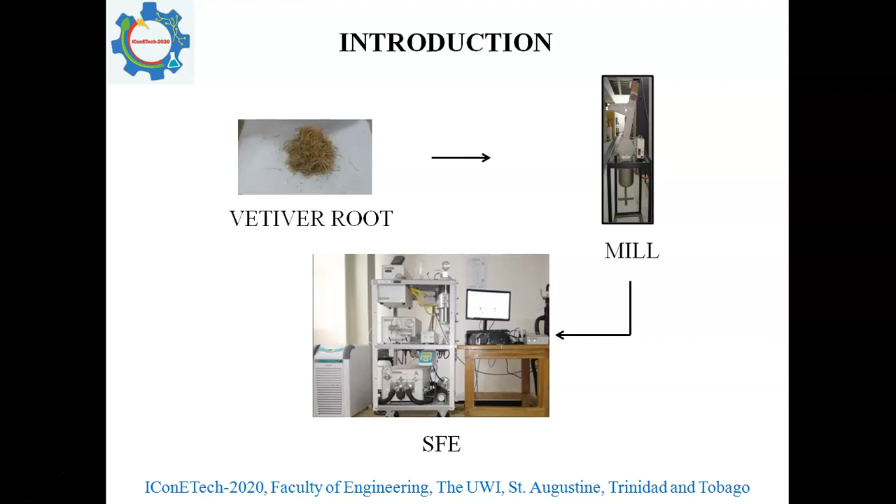The chosen extraction technique is Supercritical Fluid Extraction, abbreviated SFE, using supercritical carbon dioxide solvent, since SFE was found to be more efficient and versatile than the traditional technique of steam distillation extraction. I therefore present a process that uses recyclable supercritical CO2 as a solvent to obtain extracts from vetiver roots.

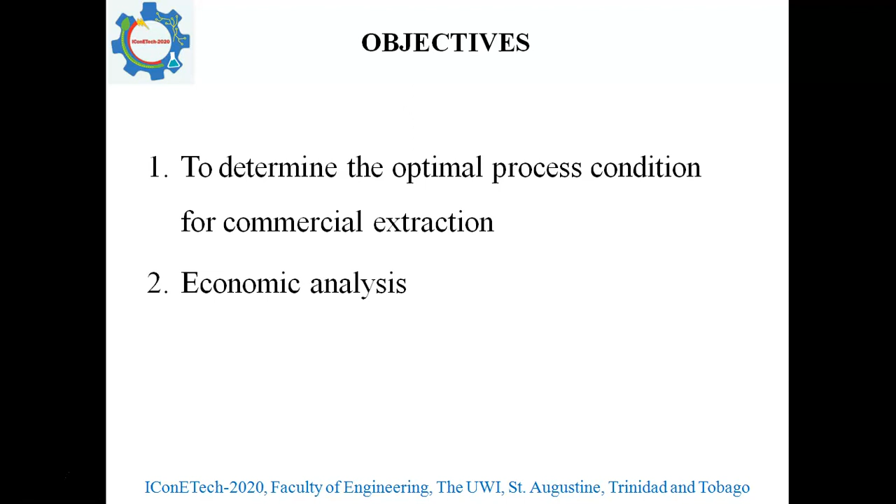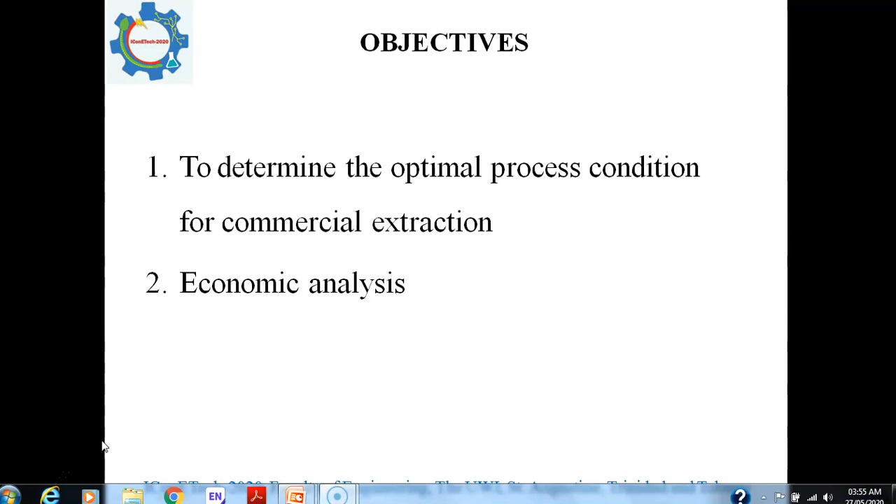Towards developing a plant extracts industry, the research objectives were to determine the optimal process conditions for commercial extraction, followed by an economic analysis to indicate whether the installation of a commercial SFE operation in Tobago might be commercially viable.

To evaluate these objectives, the interactive effects of the operating parameters of pressures, temperatures, and CO2 flow rates with respect to the oil yield were ascertained using design of experiments. The ranges of the process variables were 190 to 250 bar for the CO2 pressure, 40 to 60 degrees Celsius for the CO2 temperature, and 1 to 3 milliliters per minute CO2 flow rate.

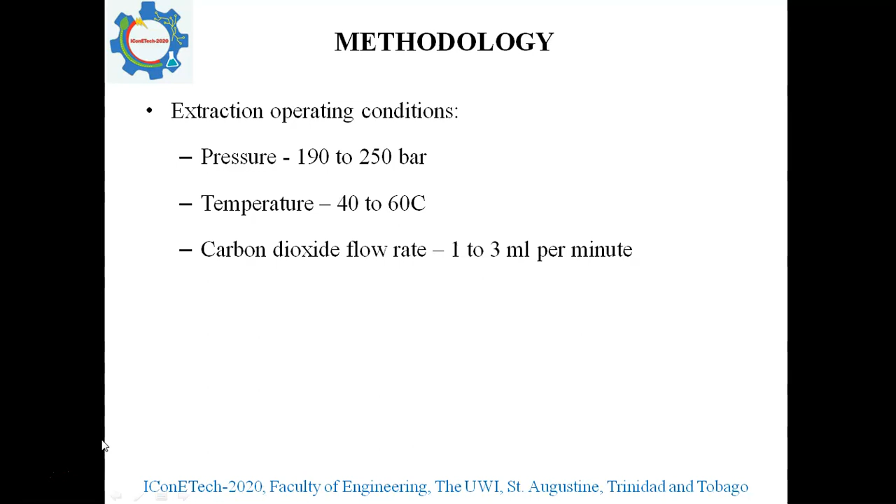A standard extraction curve was determined for each experiment by measuring the mass of collected extract every 15 minutes. Factorial design, the basis for design of experiments, resulted in an experimental program that required 8 experiments with 3 repetitive runs at the midpoint to determine reproducibility of the yield. The factors, variables, and responses for these 11 experimental runs are shown in Table 1.

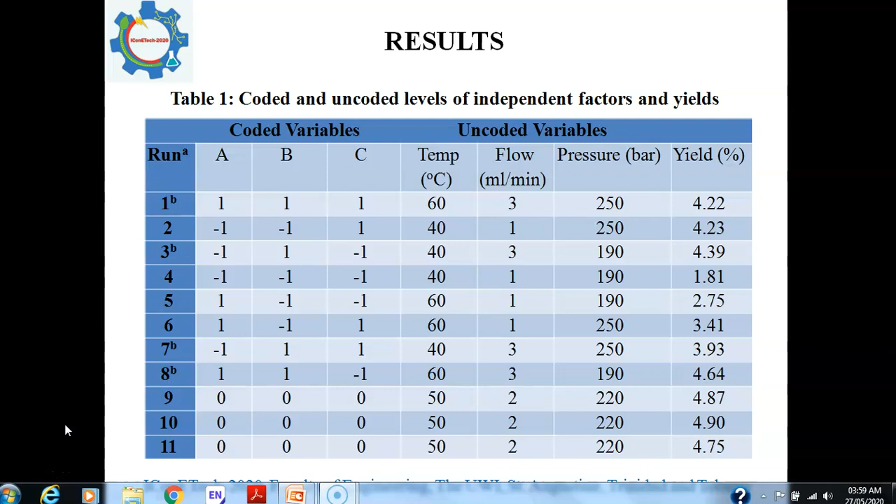The resulting extraction curves from these experiments show a high rate of extraction at the beginning of each experiment, tapering off towards the end when all of the extract has been removed. This may be due to the positioning of the essential oils within the root particles.

In the earlier extraction stages, the oil at the root's surface is removed, whereas the essential oil within the cells is extracted in progressive stages. This resistance lowers the mass transfer rate from within the cells compared to that from the surface. It can be seen that most of the essential oil was easily removed at the earlier stages of extraction.

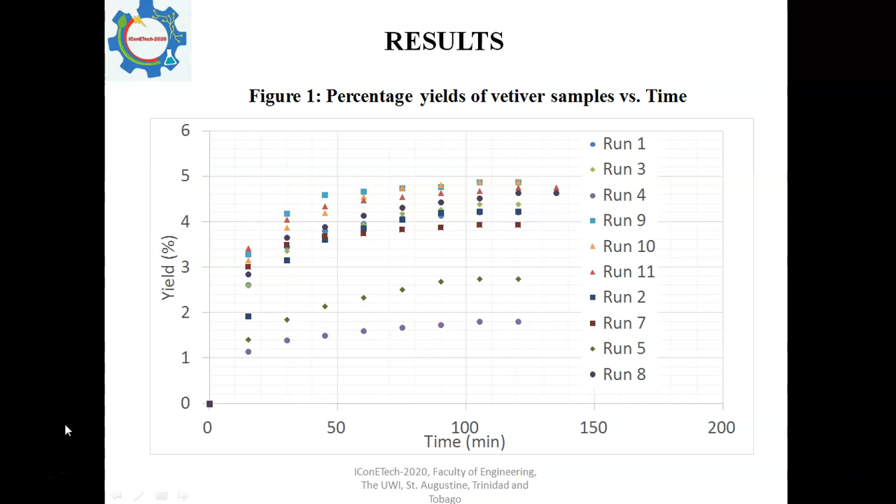The extraction data was used to determine the regression model and generate contour plots to predict the variance of the response. The final equation that was obtained is shown on the slide, and deductions were based on the resulting P and F values shown in Table 2. It was determined that the CO2 flow rate, and the pressure and CO2 flow rate, had the most significant linear and combined effect on yield respectively.

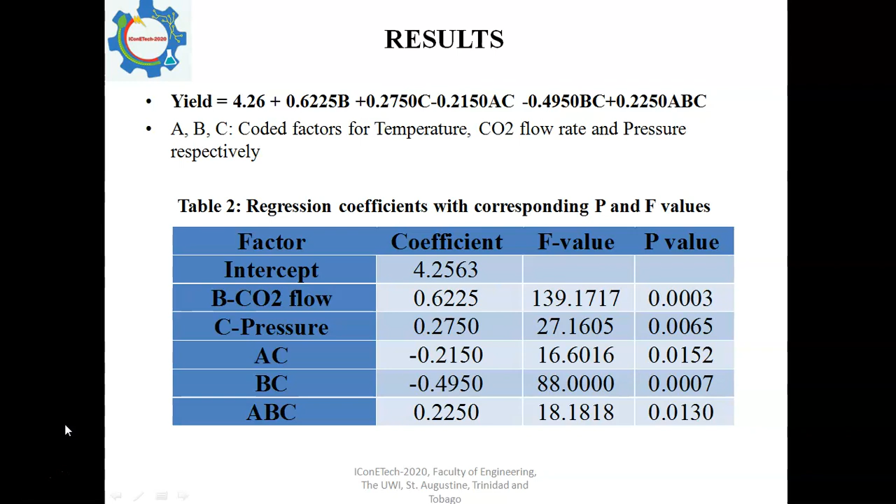The results also showed that the model fitted well, and the optimum extraction conditions were pressure at 220 bar, temperature at 50 degrees Celsius, and CO2 flow rate at 2 milliliters per minute. The yield at the optimum condition was 4.75%, which was significantly higher than those reported in the literature.

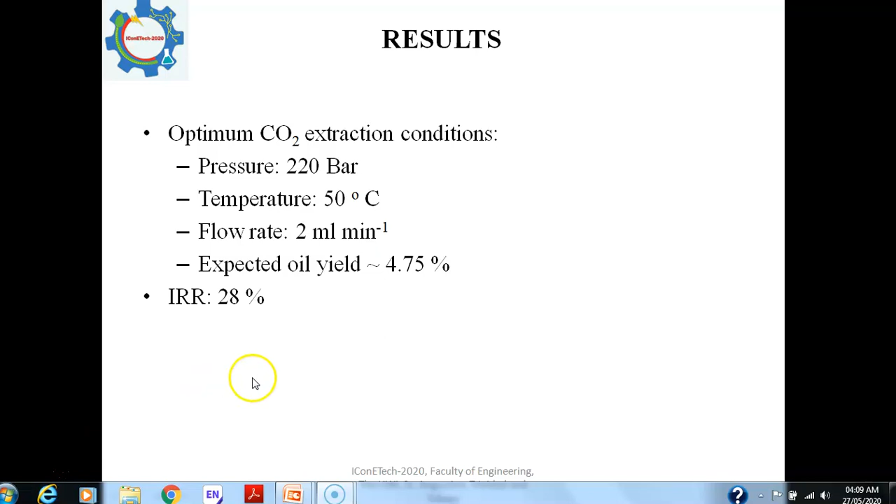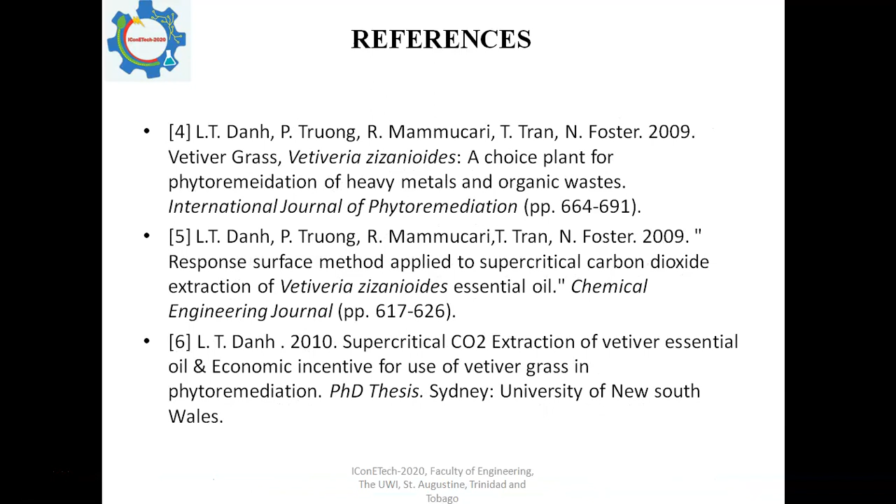A feasibility study based on using three 1500 liter extractors for a plant that would process bay and vetiver resulted in an IRR of 28%, making the project worthy of further development. Further work would involve a more detailed evaluation of the economic potential towards potential commercialization.

The research findings are encouraging and show that we have the capability to further develop and grow our own expertise, especially during a time when global restrictions necessitate being in a self-sustainable position.